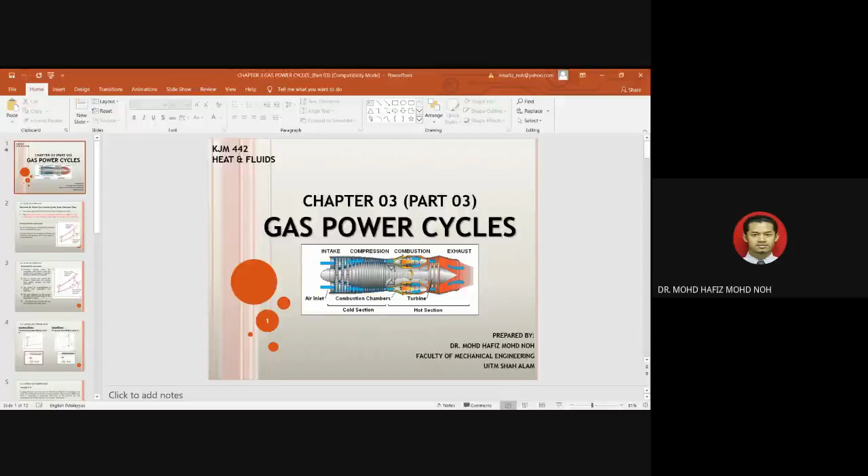Welcome back, guys. Now we go for part 3 of chapter 3, gas power cycle. In part 1 we settled the fundamentals of the gas power cycle and gas turbine engine, and in part 2 we emphasized our understanding about this gas turbine engine through several examples.

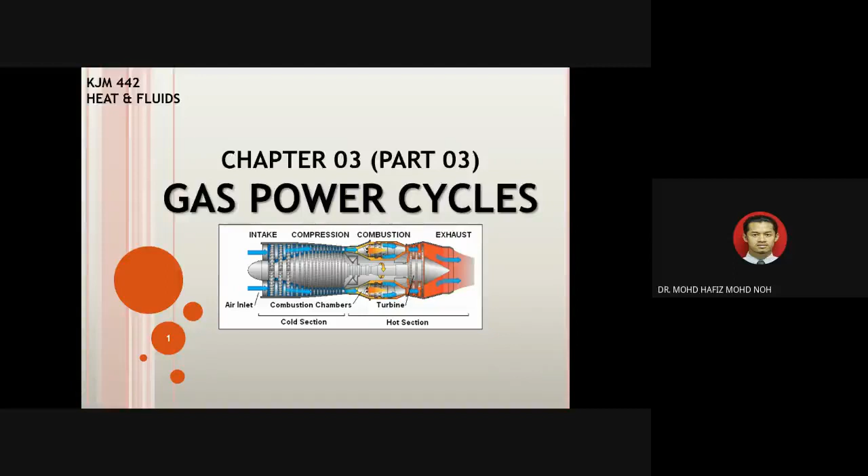So this part 3 will discuss the actual cycle of the gas turbine engine, because part 1 and part 2 only covered the ideal cycle. Now in chapter 3 part 3, we will cover the actual cycle of this power cycle.

So, deviation of the actual gas turbine cycle. The actual gas turbine cycle differs from the ideal Brayton cycle. The actual work input to the compressor will be more, and the actual output from the turbine will be less, because of irreversibility.

So what does irreversibility mean? Irreversibilities or losses of an ideal gas turbine can be determined by this figure. If you look at the T-S diagram here, for state 1 to state 2, there's an ideal condition, which is state 1 and state 2S.

S is entropy here. So this is the ideal condition, where S2S is equal to S1, and S3 is equal to S4S.

But in the actual cycle of the gas turbine engine, the compressor will produce more work, because the compressor must be overspec so that it can achieve the desired pressure you want. In the ideal condition, you produce less work but get the desired pressure. In actual operation, more power is required for the compressor, and the output from the turbine is also more or less compared to the ideal one.

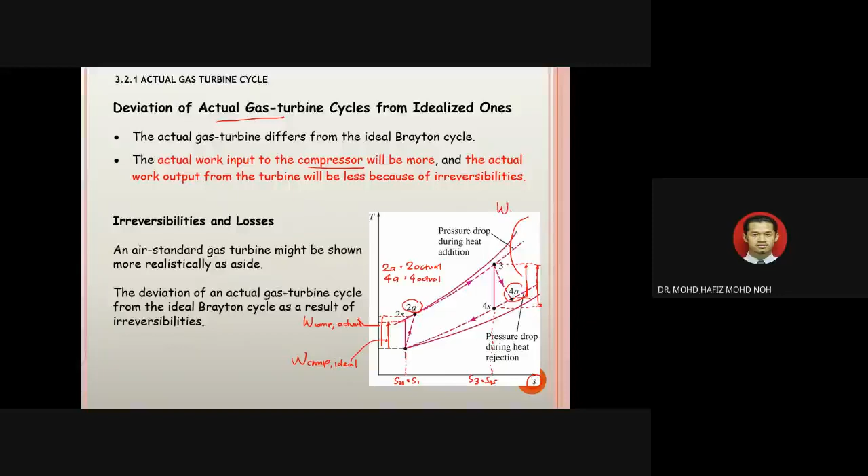The same also happens for the turbine. We have a value here, and another value coming out from here. This stage we call W turbine actual, and here we call W turbine ideal. So here is ideal turbine work, this is actual turbine work, here is actual compressor work, and here is ideal compressor work.

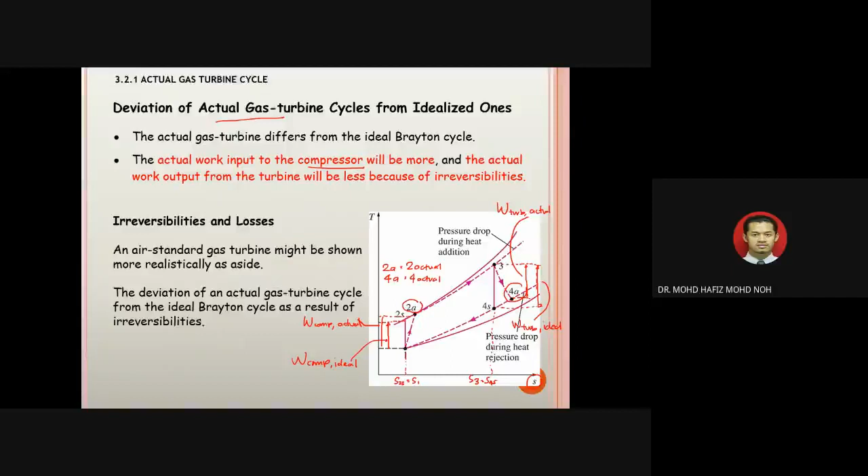So the frictional effects within the compressor and turbine cause the working fluid to increase in specific entropy. Due to this friction, they also cause the pressure drop when the working fluid passes through. Because there is friction, you can imagine the compressor rotating, and the airflow inside interacts with the turbine blade or compressor blade, causing friction. This friction basically reduces the pressure.

You can imagine this like when you drive a car or a motorcycle. At the ideal condition, when your tire has a good amount of air, you can go very smoothly, you can move very smoothly. But what happens if your tire has very little air inside it?

So of course you will go slow, but you need more power to press that as compared to the ideal air inside the tire. So you can see that. That means if the air in the tire is lower, the contact area between the tire and the road is much larger, so they will increase the friction. So this happens with the compressor and turbine.

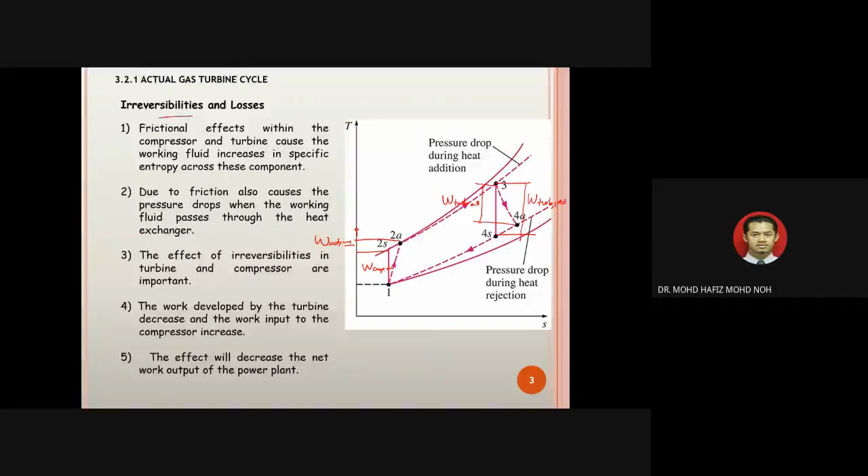Okay, so due to these losses, we can basically represent this in terms of the compressor efficiency, or we call it isentropic efficiency for the compressor. And then as well as the turbine, we have the turbine efficiency, which we call the isentropic turbine efficiency.

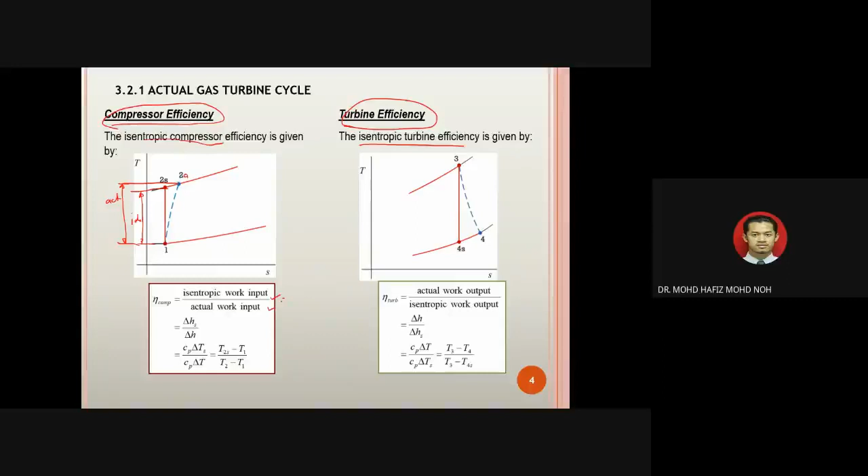This isentropic efficiency for the compressor can be determined by the ratio between this one and this one — the ratio between the ideal work and the actual work. So that's ideal work divided by actual work: W compressor ideal divided by W compressor actual.

So from here it's M dot Cp T2S minus T1, because T ideal is between T2S and T1. And here is M dot Cp T2 actual minus T1. So you can simplify that, and the result will be T2S minus T1 divided by T2 actual minus T1. So this is going to be your isentropic efficiency for the compressor.

But it's different for the turbine. Here is going to be your actual W actual, and here is going to be your W ideal, so the small amount divided by the larger amount. That's why here it's W turbine actual divided by W turbine ideal.

So from the formulation, M dot Cp T3 minus T4 actual divided by M dot Cp T3 minus T4S. This can be simplified, so the result will be like this: T4 actual divided by this one. This one we call the isentropic efficiency for turbine.

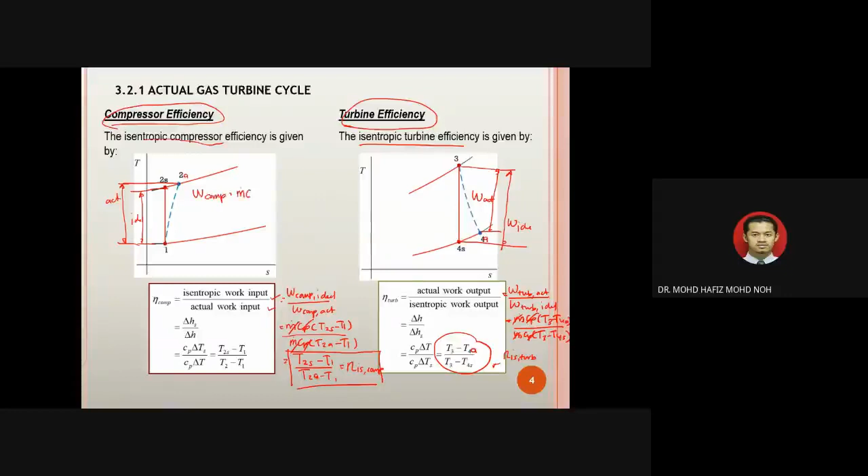Clear? So when you get the value of actual for each, T2 actual and T4 actual, if you want to calculate W compressor, the formulation uses T2 actual minus T1, whereas before you used T2 ideal. It's similar with the turbine: W turbine is M dot Cp T3 minus T4 actual. So this is going to be the work for the turbine. Alright guys, I hope you understand.

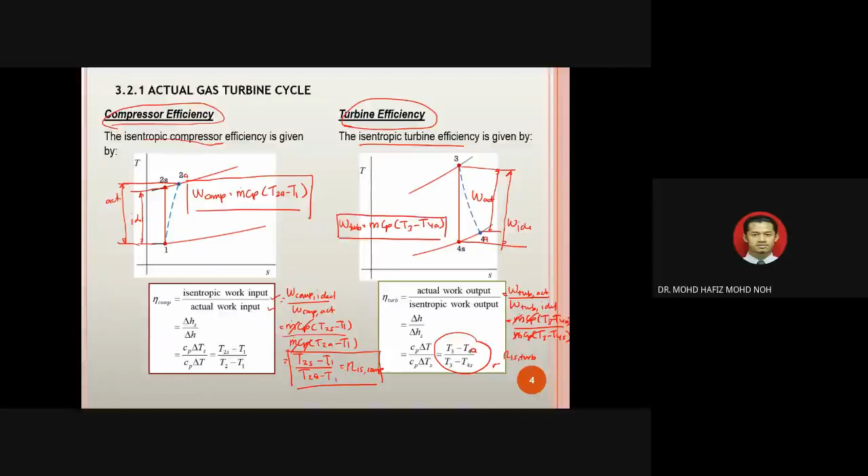So now we try to do some example. A simple Brayton cycle using air as the working fluid with a pressure ratio of 10, and the minimum and maximum temperatures in the cycle are 295 Kelvin and 1240 Kelvin.

Assuming that the isentropic efficiency is 83% for the compressor and 87% for the turbine, you have to calculate the air temperature at the turbine exit, the net work output, and the thermal efficiency.

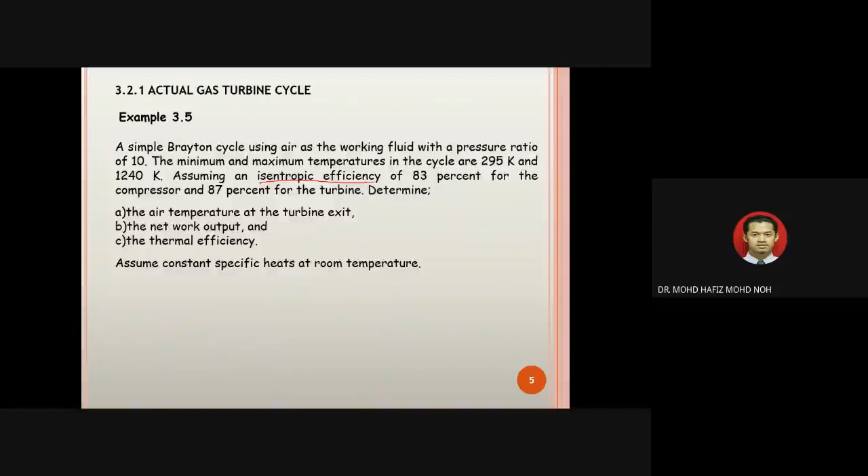Okay, the keyword here is isentropic efficiency. So when you find the value of isentropic efficiency, that means this value is going to be the actual cycle. So this is the key, the first one is isentropic efficiency. Okay, we try to solve this. So the first one, okay, so we got this one, isentropic efficiency.

Right, so this one is actually the actual cycle, like I explained to you before in the ideal cycle. So before you start, you have to develop your TS diagram. Okay, so for TS diagram, this is a basic cycle for TS diagram.

So 1, 2S, 3, 4S, and then they give you the value of isentropic efficiency, that means there will be 2 actual and 4 actual. So you have to find all each state value, which is state 1, state 2s, state 2a, the value of 3, 4s, and 4a as well.

Okay, right, so in the question they give you the value of pressure ratio Rp, which is P2 over P1, is equal to 10. And then in the question it also gives you the value of T1, so T1 is 295 Kelvin. And then they also give you the value of T3, which is 1240 Kelvin.

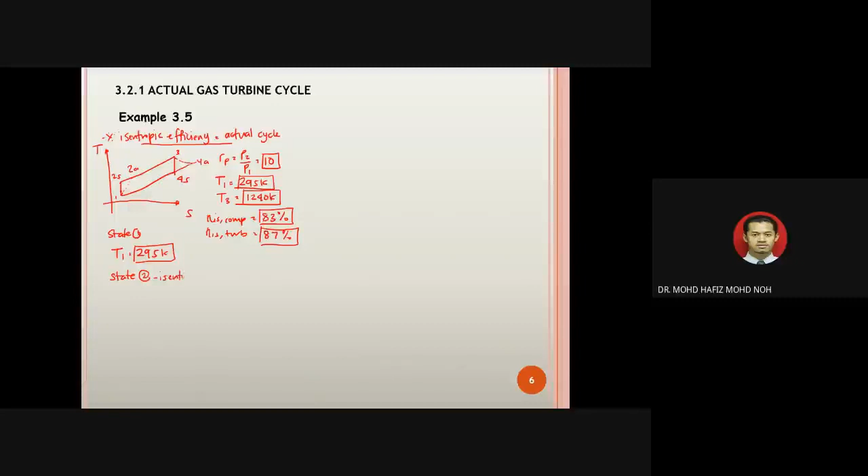For state 2, okay, because this process is isentropic compression, you can use the isentropic relationship, which is T2S over T1 equal to P2 over P1 powered by K minus 1 divided by K.

So this one is equal to Rp to the power of K minus 1 divided by K. So T2S actually is equal to T1, 295 Kelvin, times Rp, where Rp is equal to 10, powered by 1.4 minus 1 divided by 1.4. So from here you get the value of T2S is equal to 569.556.

Okay, right, and then to find the value of T2 actual, you have to use the isentropic efficiency for the compressor, because the isentropic efficiency for the compressor is W compressor ideal divided by W compressor actual.

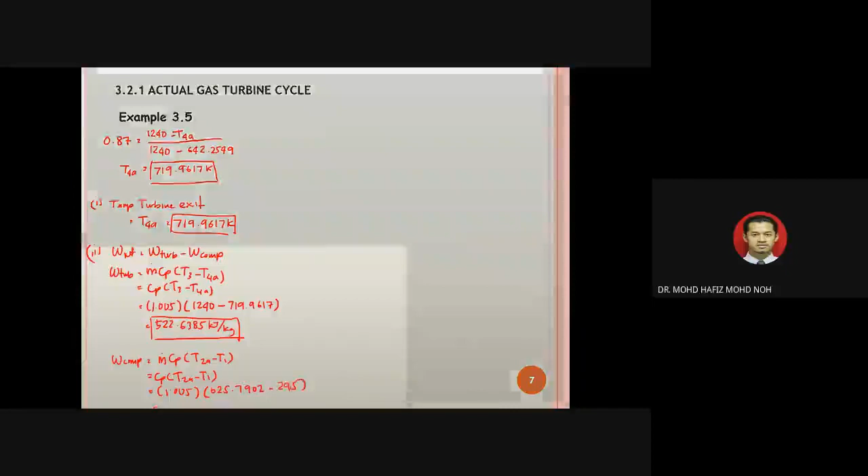So from here you will get the value of W compressor, which is 332.4441 kilojoule per kg. Right, guys. Okay, I think you understand.

Now you can proceed to calculate W net. W net is W turbine minus W compressor. So W turbine is 522.6385 minus 332.4441. So W net here, we can find the value is 190.1944 kilojoule over kg.

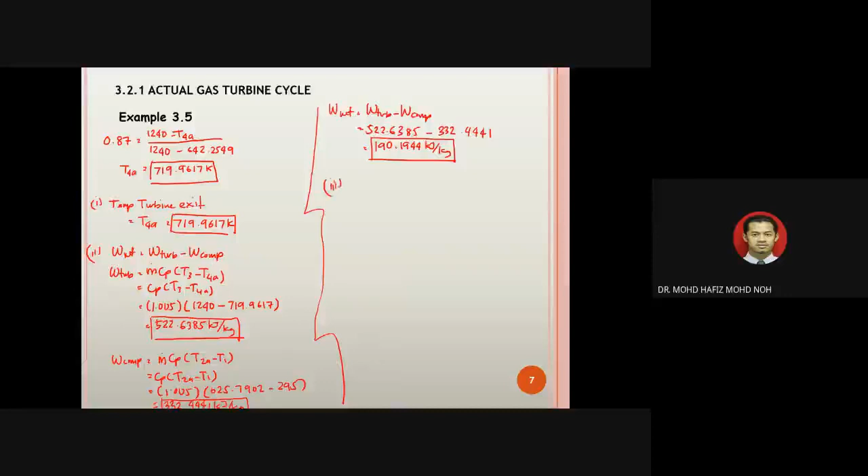Okay, the last question is we have to find the value of thermal efficiency, right? Thermal efficiency is W net over Q in. W net is already found, which is 190.1944. And then the value of Q in is m dot Cp, T3 minus T2 actual, so Cp, T3 minus T2 actual.

So 1.005, T3 is equal to 1240 minus T2 actual. T2 actual is 625.7902. So you can find the value of Q in, which is 617.281 kilojoule per kg.

Once you find the value of Q in, then you can proceed to calculate the value of thermal efficiency. Thermal efficiency is W net, 190.1944, divided by 617.281. So from here, you will find the value of thermal efficiency is 0.308.

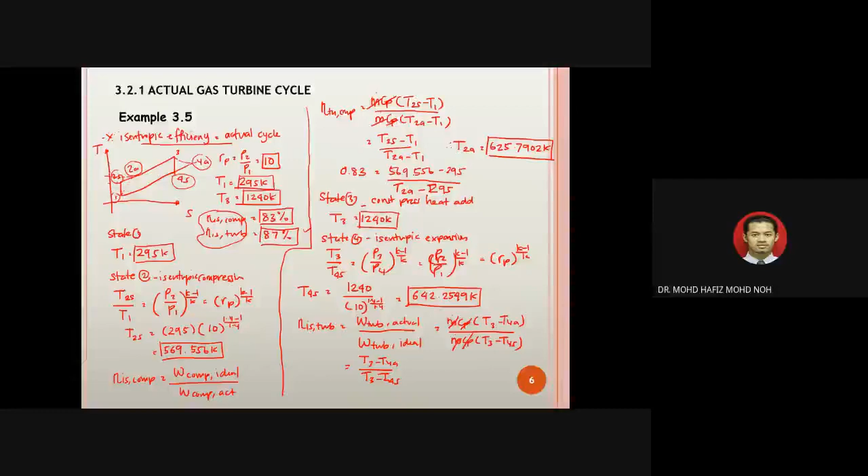Okay guys, and then we can proceed to another question, example 3.6. Air enters the compressor of an air standard Brayton cycle at 100 kilopascal, 300 Kelvin, with a volumetric flow rate of 5 meter cubic per second. The compressor pressure ratio is 10, the turbine inlet temperature is 1400 Kelvin, and the turbine and compressor each have an isentropic efficiency of 80%. So that means this is going to be the actual cycle. You have to calculate the thermal efficiency, back work ratio, and net power developed.

Okay guys, so since this is an actual cycle, start your calculation with the TS diagram. So here 1 to 2S, 3 to 4S. And here we have 2 actual, and here we have 4 actual.

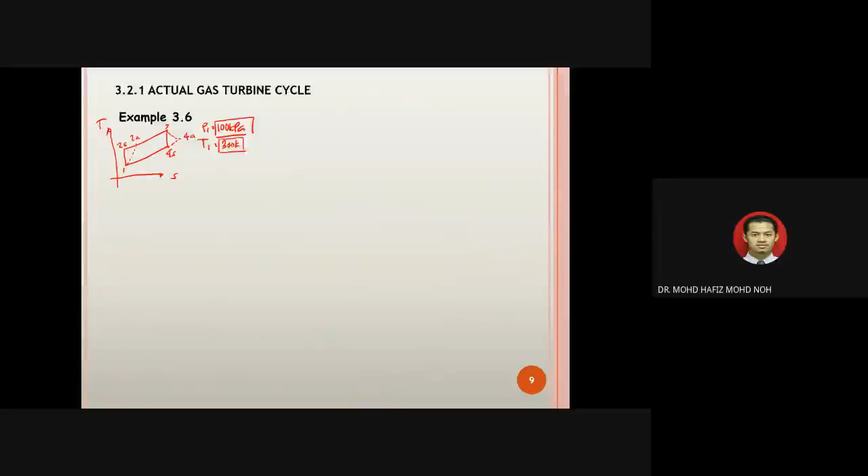In this question they give you the value of P1, which is 100 kilopascal. And then the value of T1 is given also, which is 300 Kelvin. And then they give you the value of volume flow rate, V1, which is 5 meter cubic per second. And then at the same time, the value of RP equal to P2 over P1, which is 10 in this case.

And then T3 is equal to 1400 Kelvin. And then the value of isentropic efficiency for the compressor, and also equal to isentropic efficiency for the turbine, which is 80%.

Okay, so now we do state by state, starting with state 1. State 1, P1 is given as 100 kilopascal, and then T1 also given by 300 Kelvin, and then V1 actually is equal to 5 meter cubic per second.

And then you go for state 2. State 2 is an isentropic compression. So we have T2S over T1 equal to P2 over P1 powered by K minus 1 divided by K, which is also RP to the power K minus 1 divided by K. So T2S is equal to T1, which is 300 Kelvin, and RP is 10, to the power 1.4 minus 1 divided by 1.4.

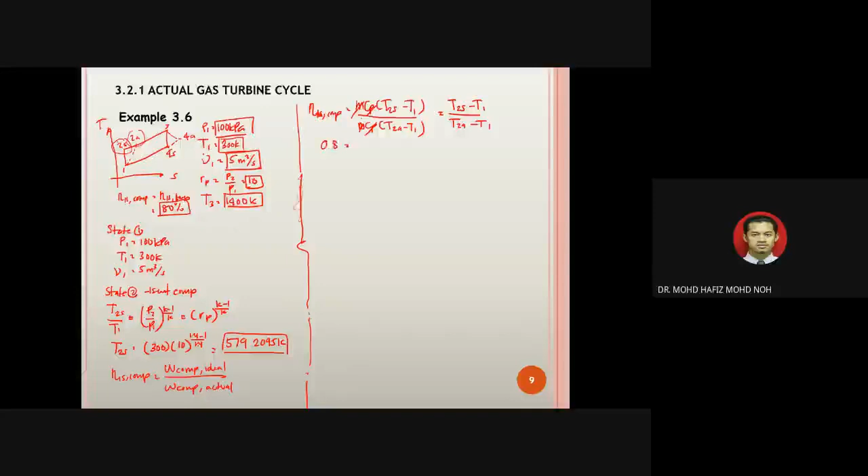The isentropic efficiency for the compressor is given as 80%, so 0.8 equals T2S minus T1, which is 579.2095 minus 300, divided by T2 actual minus 300. From here you get the value of T2 actual, which is 649.0116 Kelvin.

And then you go for state 3. It's a process of constant pressure heat addition, so T3 is given as 1400 Kelvin.

And then you go for state 4. State 4 is an isentropic expansion, so you can use the isentropic relationship T3 over T4 equal to P3 over P4 powered by K minus 1 divided by K, which also equals P2 over P1 to the same power, so this equals the same pressure ratio.

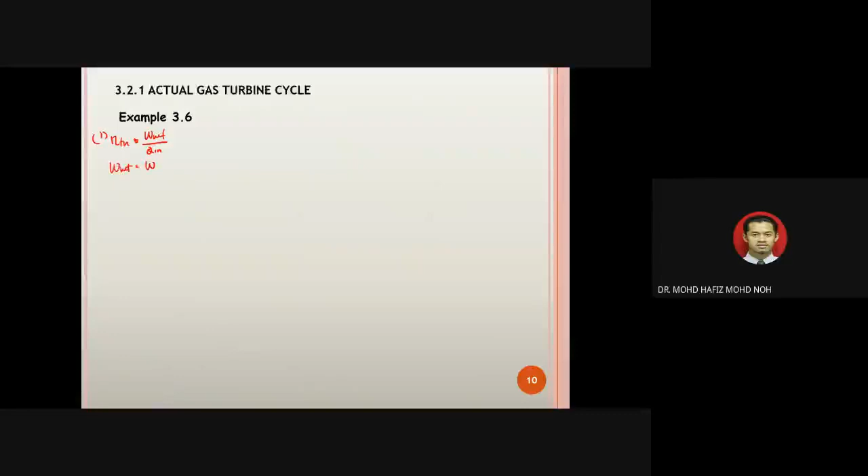Calculate W net. W net can be calculated by W turbine minus W compressor. W turbine can be calculated by M dot Cp T3 minus T4 actual. In this case they give you the value of volume flow rate, so you have to find the value of the mass flow rate.

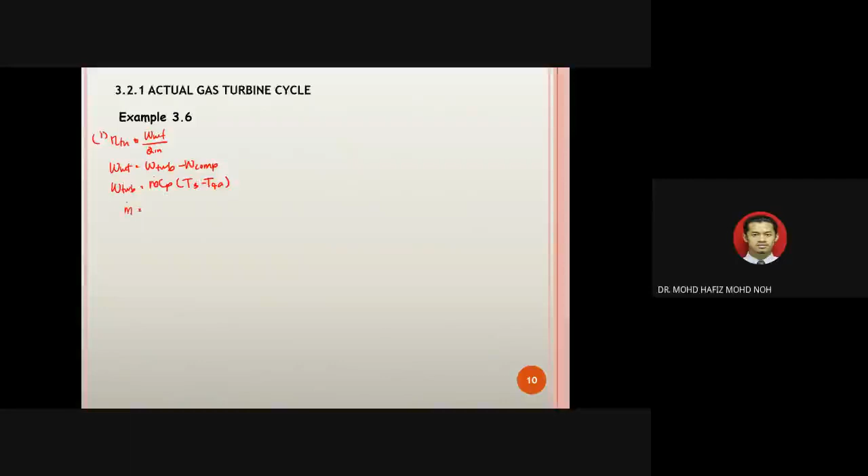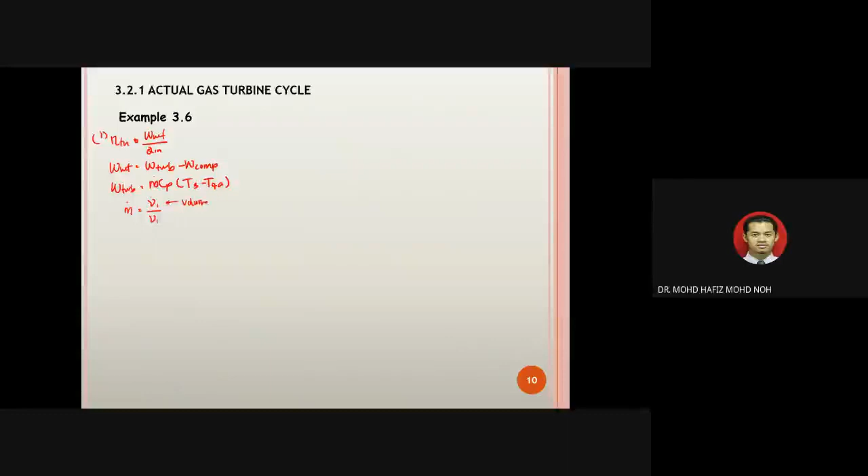The mass flow rate can be found by using the formula of volume flow rate divided by specific volume. This one is the volume flow rate, and this one is going to be your specific volume.

Okay guys, so the value of the volume flow rate has been given as 5 meter cubic per second. Now you have to find the value of specific volume. Specific volume can be found by using this formulation, using the ideal gas law.

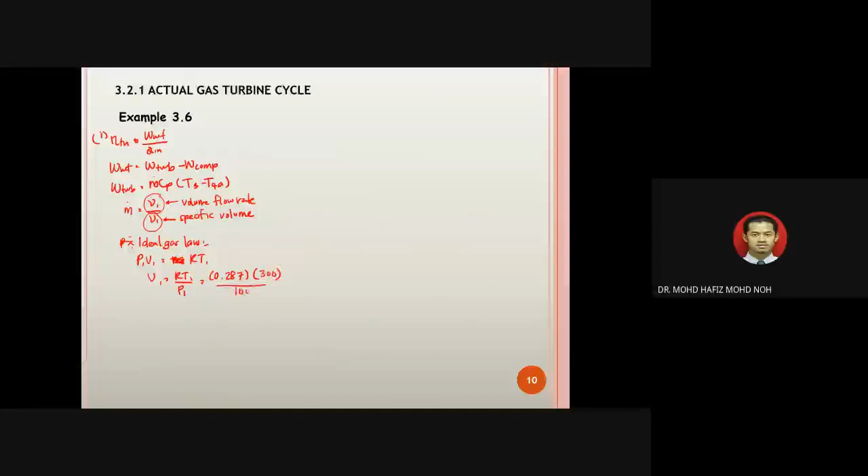Which is P1 V1 equal to RT1. So V1 here is RT1 divided by P1. R here is a constant which is 0.287, and T1 is given as 300 Kelvin, and P1 is also given as 100 kilo Pascal. Now you can find the value of V1 here is 0.861.

This is constant, so you use 0.287. Now you can find the value of mass flow rate. The mass flow rate is volume flow rate divided by specific volume. So 5 meter cubic per second divided by 0.861. Then you can find the value of mass flow rate is 5.81 kilogram per second.

When you find the value of mass flow rate, then you can find the value of W turbine. W turbine is mass flow rate, Cp, T3 minus T4 actual. So mass flow rate is 5.81, Cp is 1.005, T3 is given as 1400 Kelvin, minus T4 actual which we already found is 860.1112. Eventually you get the value of W turbine will be 3152.496.

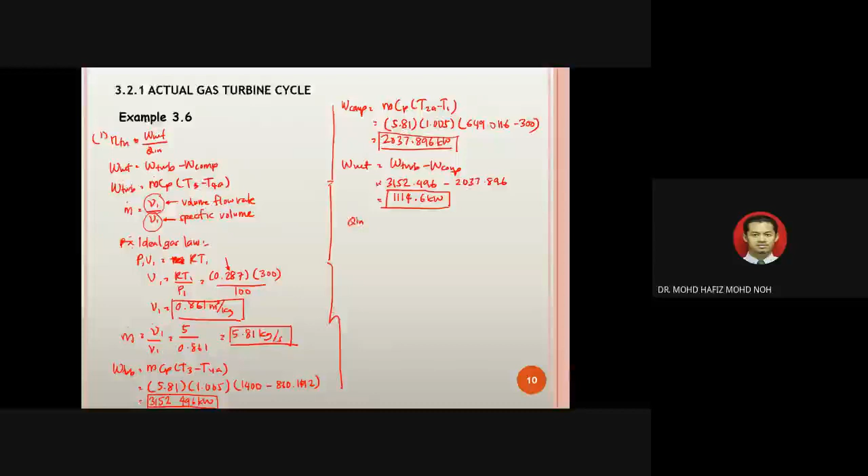Then you proceed to calculate the value of Q in. Q in is M dot Cp T3 minus T2 actual. So M dot is 5.81, Cp is 1.005, T3 is 1400, and T2 actual is 649.0116. Then you get the value of Q in, which is 4385.059 kilowatt.

Now you get the value of W net and Q in, then you can proceed to calculate thermal efficiency, W net over Q in. So W net is 1114.6 divided by 4385.059. From here you can get the value of thermal efficiency is equal to 0.254. You guys please check.

Question number 2 requests you to calculate the value of back work ratio. Back work ratio is simply the ratio between W compressor divided by W turbine. So W compressor is 2037.896 divided by W turbine which is 3152.496. So back work ratio is equal to 0.6464.

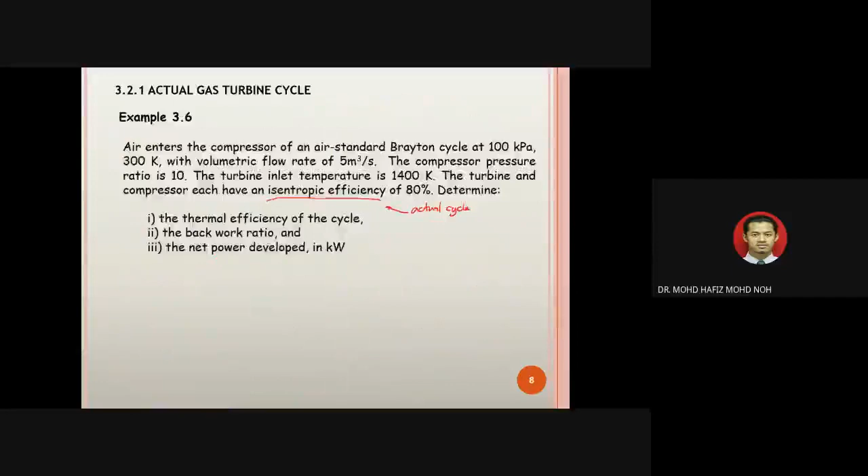Alright, nice number. Question number 3 requests the calculation for the net power developed, W net. W net you already calculated, which is 1114.6 kilowatt. So this is an example that you can use as your basis to calculate the actual gas turbine cycle.